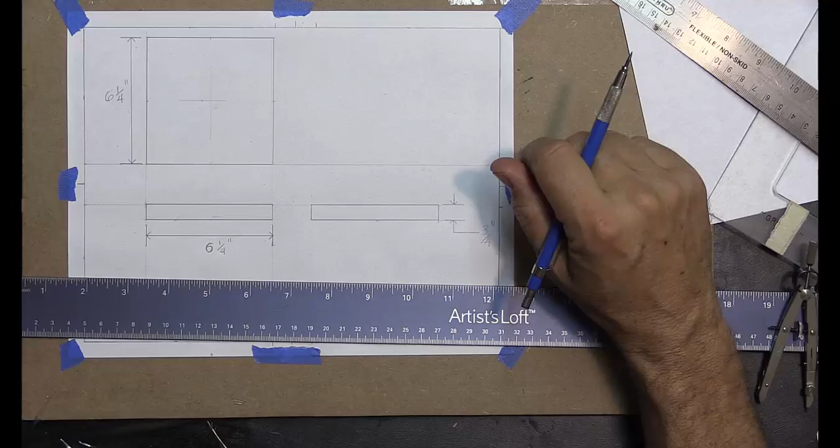Now, when I look at my tissue box right here, I've got this measurement here which says it's 2 3/8. That's not a problem, so it's 2 3/8 at 1-to-1 scale. Remember, we're drawing at half scale — I forgot about doing that earlier.

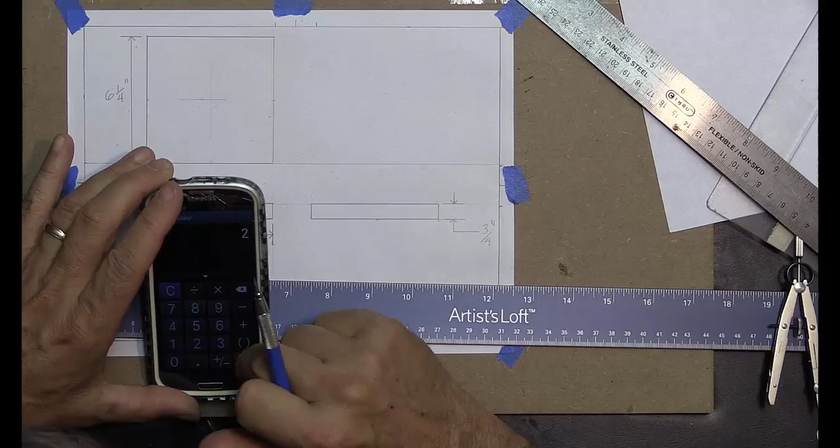So I'll come back here and clear my math out. Let's see, 3/8 should be 0.375. I'm not sure about decimals and 3/8 and 16ths and all that.

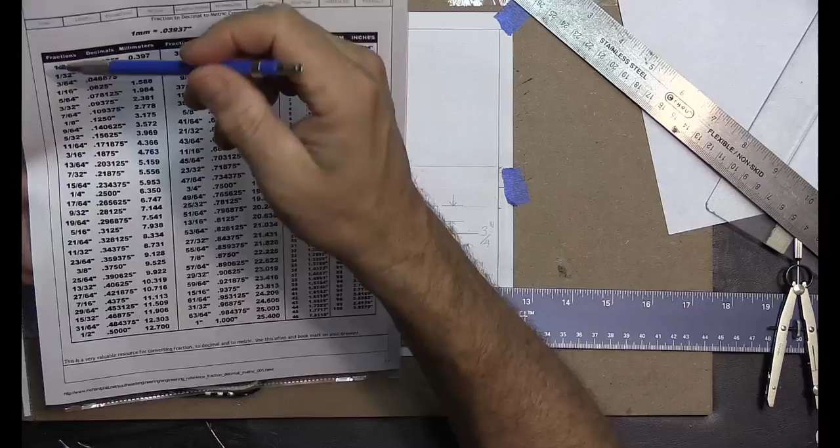Go to richardplatt.net, go to the Southeast Engineering section, and on the engineering pull-down you'll see a reference link. From there, the first thing on the list is a fractional chart that shows fractions, decimals, and millimeters. This gets a lot of use — you ought to print one out and put it where you can get to it.

Okay, so the hole was 2.375. We're going to divide that by 2 because we're dealing with half scale in our drawing. Then let's further divide that by 2 because we need the radius. So I get the radius, which comes out to 0.59375.

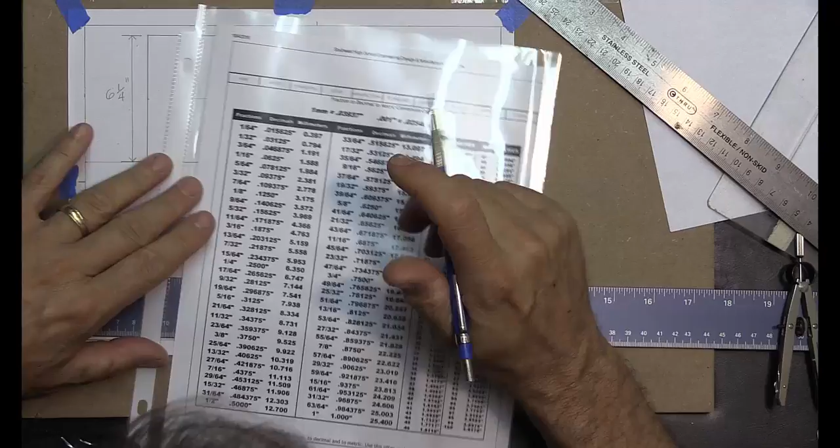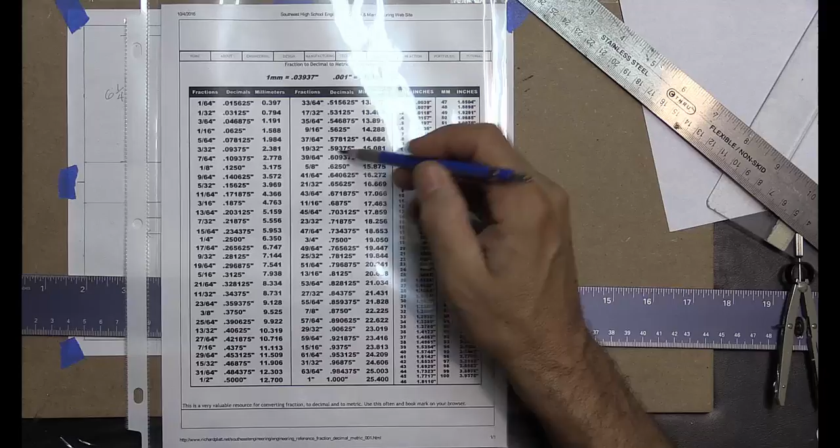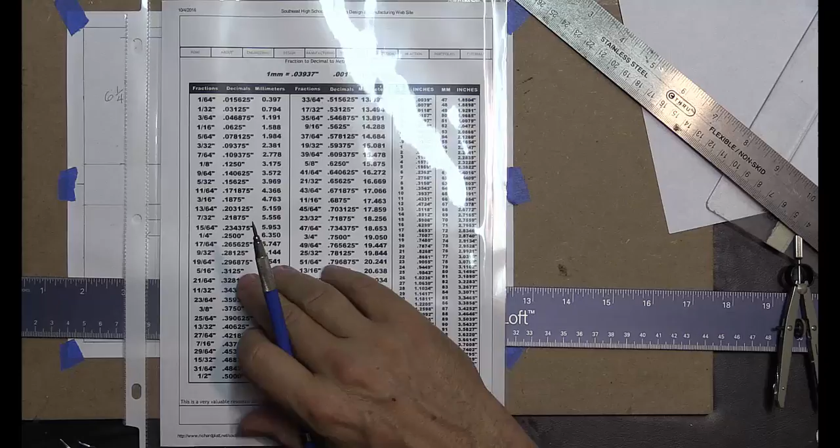So basically it's 5/16 — let's double check that. No, actually it's not 5/16, it's 9/16. So it says 0.59375 — actually it's 19/32. That's why you had to print this chart out. So 19/32, well, 18/32 is 9/16 inch. So it's basically one 32nd over that measurement.

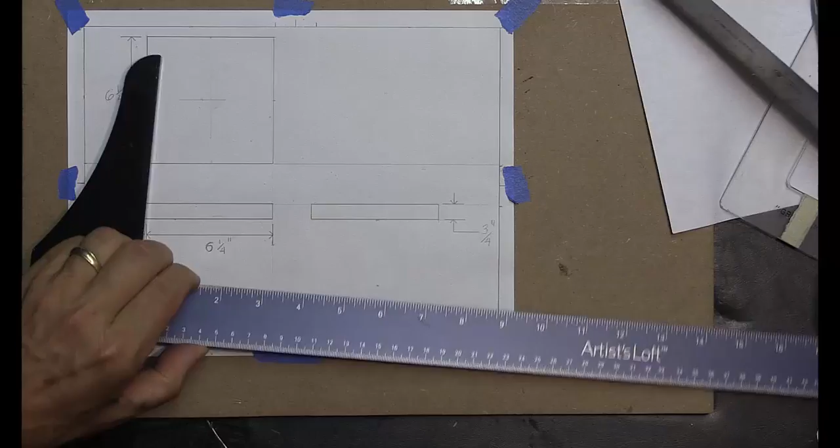So I'll take my scale here and my compass, and you can actually see that nomenclature on the compass. It's probably a little clearer if I move my T-square over. I've got to go find that scale, so I see it right here. Use my pencil to point this out — if this is a 1/2 inch, it's this mark right here next to that, that's a 16th and that's an 8th. So the mark right after 9/16 inch is your 19/32.

So what I'll do is put my compass right there and tune it where it goes all the way in, like you're seeing here. Okay, I got a little too far in, so I'll make a quick adjustment — let's do that a little bit more. Okay, so we got it exactly where we need it.

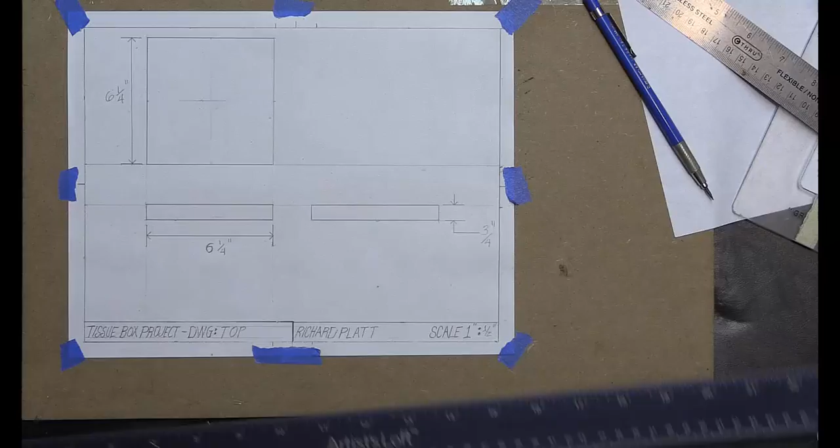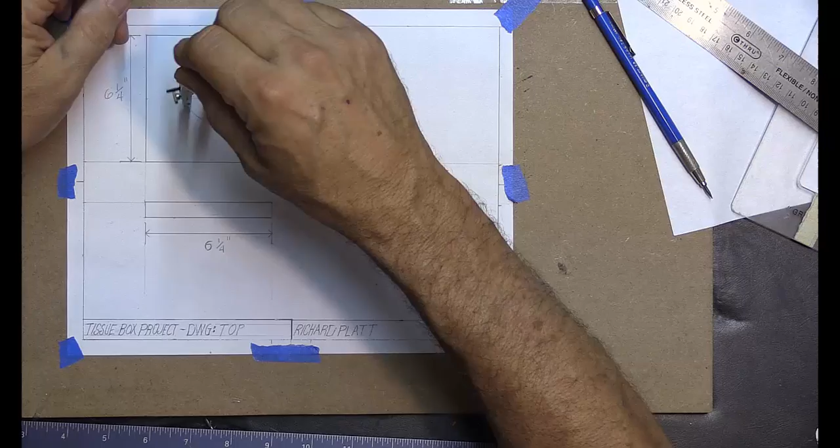Now, in drawing our circle, I'm going to put this here in the center, as you can see, and I'm going to drag it and draw my circle. It's kind of light, so I'll go ahead and do that again. If you punch through your paper, that's okay, it's kind of part of the process. As I go over it again and again, the line gets darker and darker, and I keep going both ways to get that line. So there's my circle for my opening.

Now proportionally, that looks correct, as you can tell. It looks a little bit more accurate. I don't know if you can see both of these at the same time, but proportionally the size of the circle versus the outer area makes it look correct.

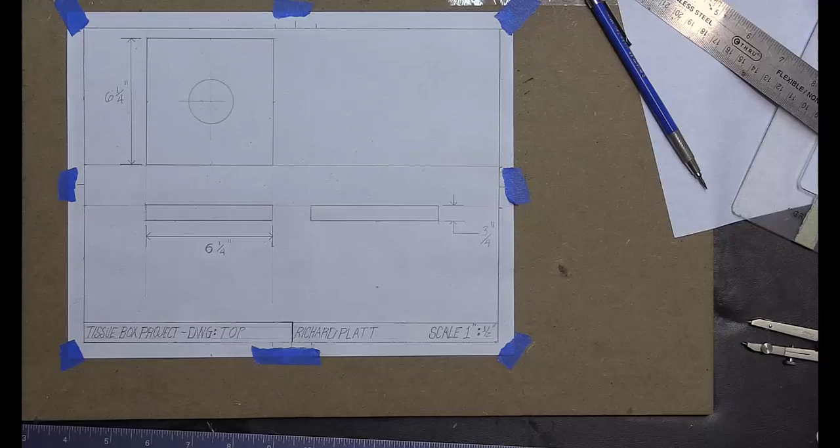All right, so now we need to dimension that. Again, our opening was 2 3/8, I believe — let's double check again, so it's going to be 2 and 3/8. All right, so we'll go ahead and dimension this circle.

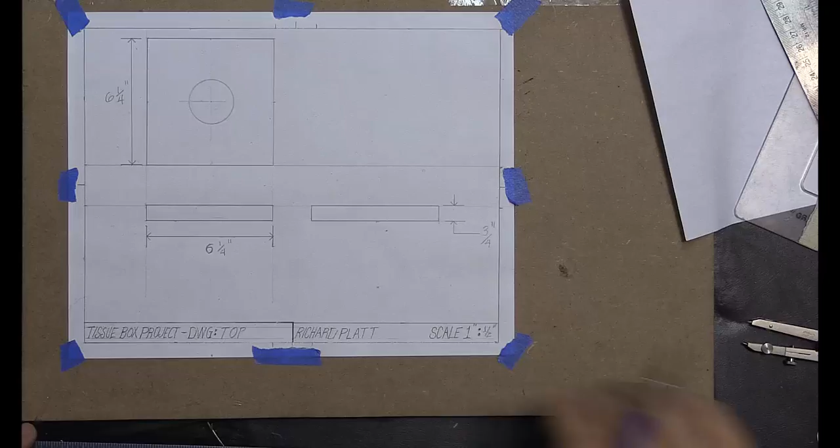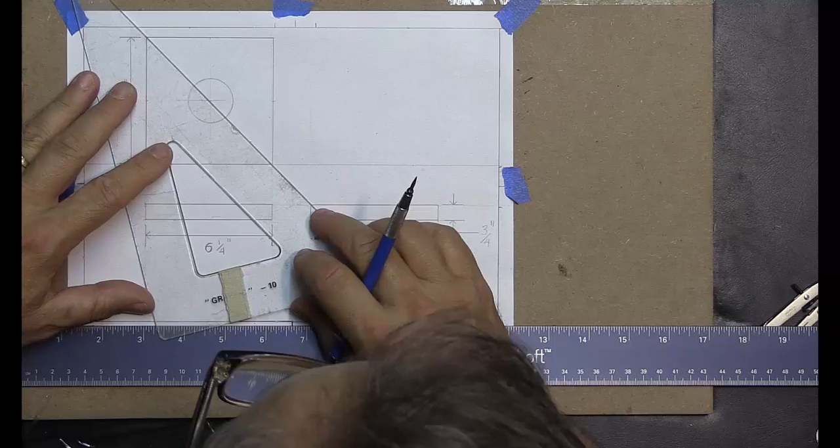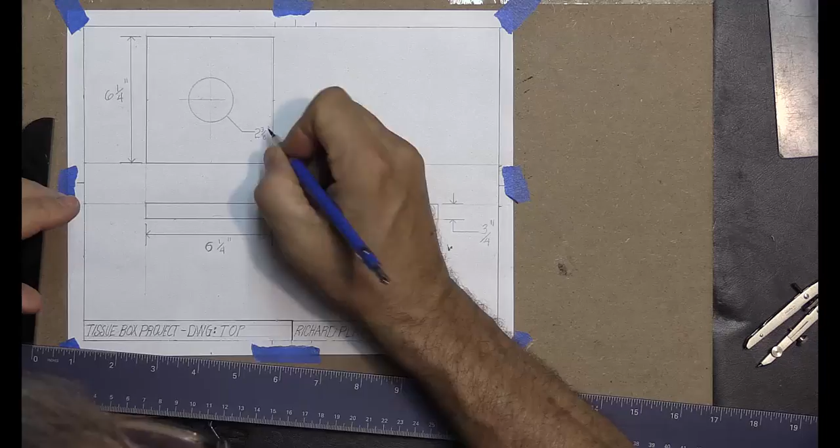I'll come across there, and about right there, and I can go ahead and put my dimension in, which would be 2 3/8 of an inch. Okay, where's my good old friend, the eraser shield? Eraser shield is right here. And based on the fact that I'm going to the outer edge, that signifies I'm talking about the diameter.

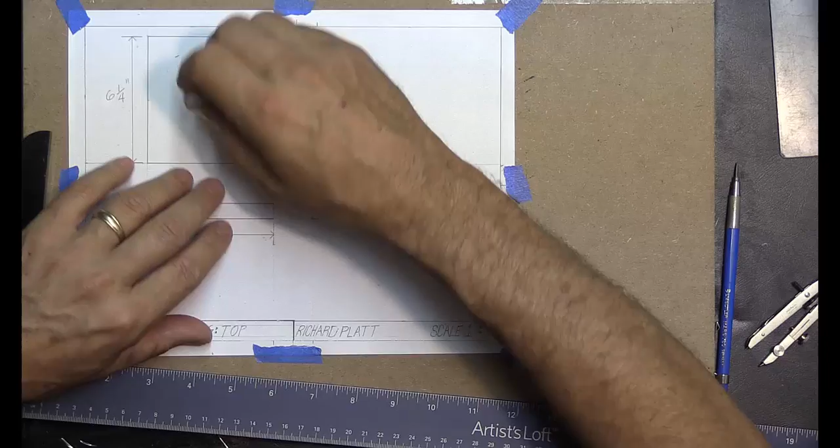Okay, so that's good. Now let's clean this up a little bit. You can leave the crosshairs in there if you need — a lot of people who do drafting will do that as well. Okay, so that's looking pretty good.

What I'm going to do now is get started on the drafting of this guy. So before we get started on that, we'll go ahead and stop right now, and we'll come back and do that part.